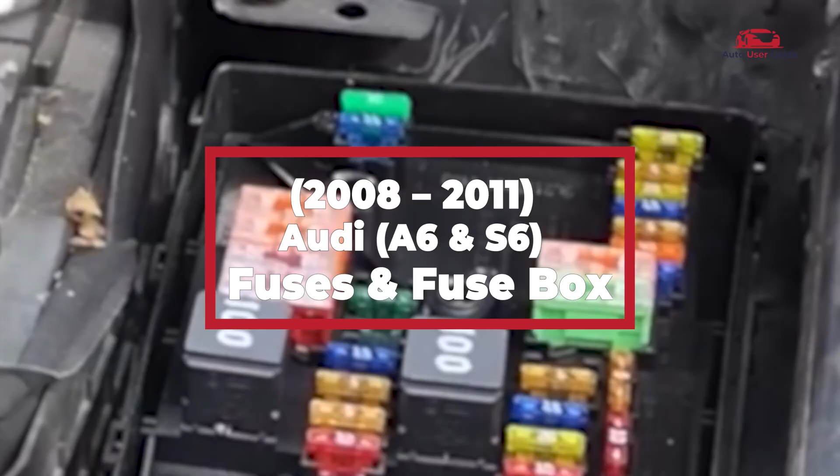Are you trying to locate the fuse box in your 2008 to 2011 Audi A6 and S6? Wondering where each fuse is placed or how to read the fuse box diagram correctly? In this guide, we'll walk you through the exact location of the fuse box and provide an easy-to-understand diagram to help you identify the fuses for various systems.

Passenger compartment fuse box.

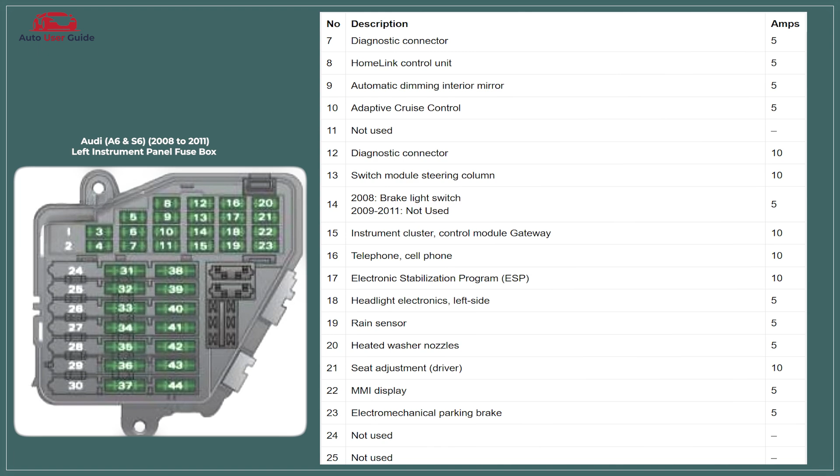The left instrument panel fuse box in the 2008 to 2011 Audi A6 and S6 powers key interior systems such as the instrument cluster, lighting controls, and infotainment. It also supports functions like the central locking system, diagnostic port, and electronic steering column lock.

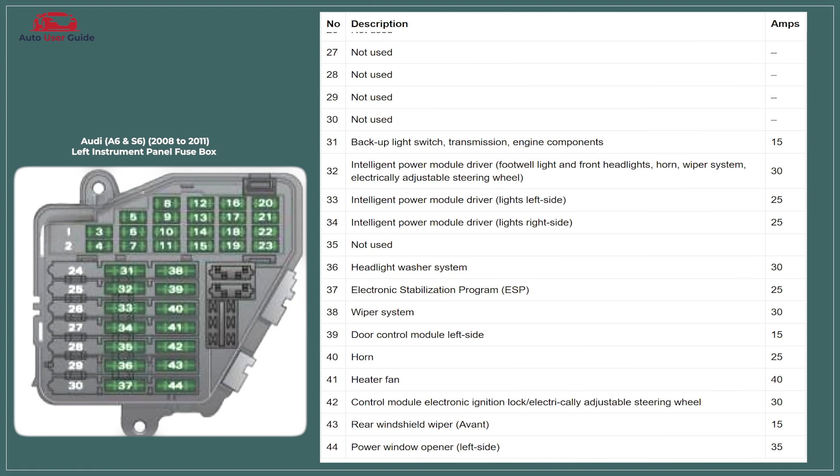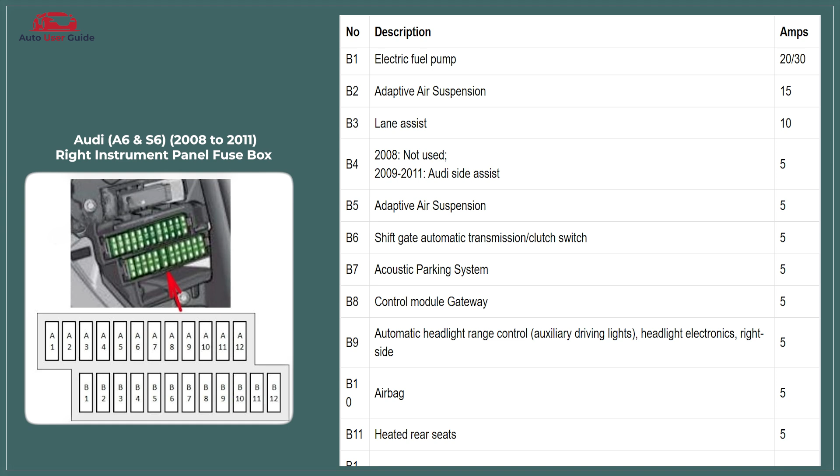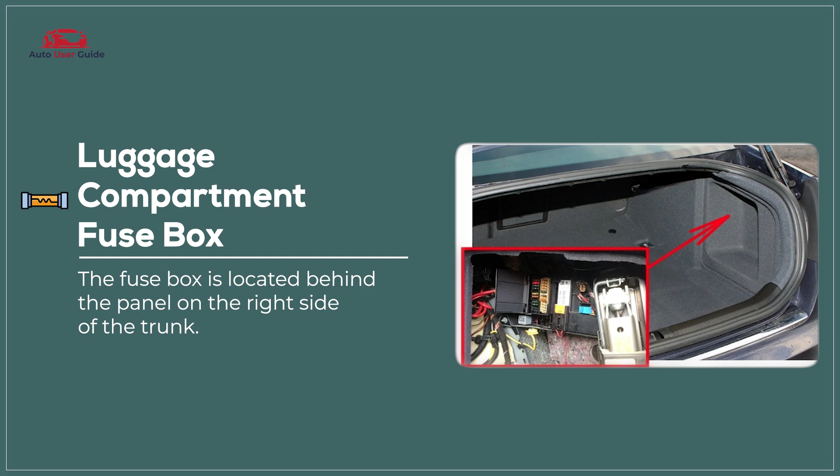The luggage compartment fuse box in the 2008 to 2011 Audi A6 and S6 is responsible for powering rear-end systems such as the rear lights, electric tailgate, parking sensors, and multimedia amplifier. It also supports components like the trailer module and rear power outlets.

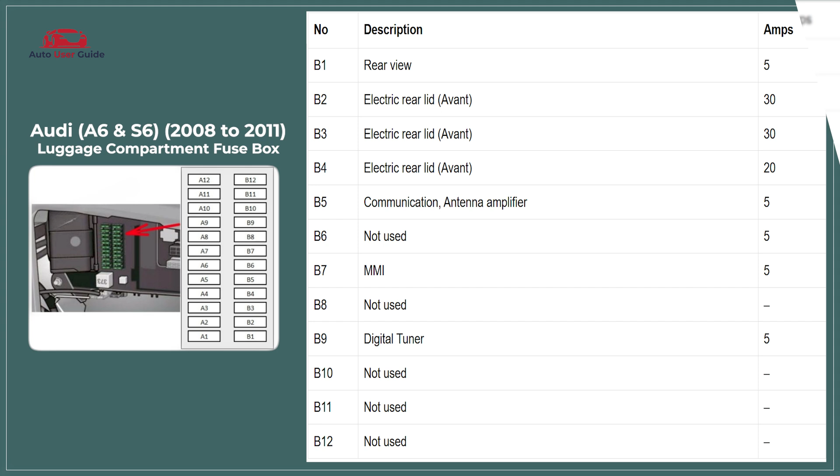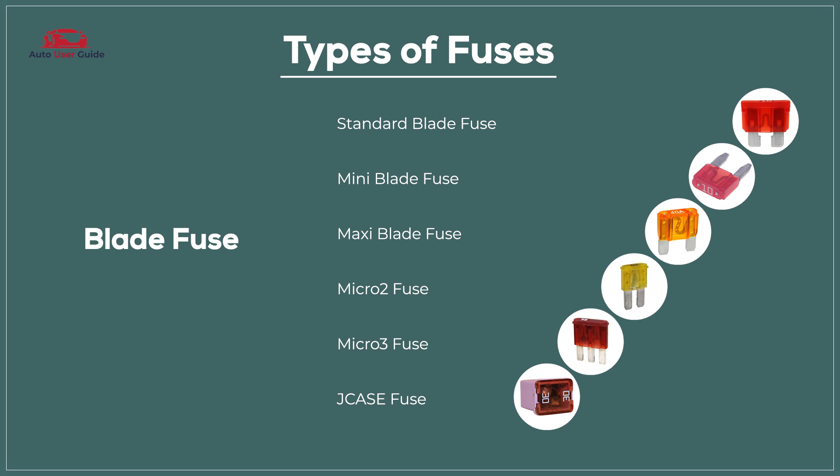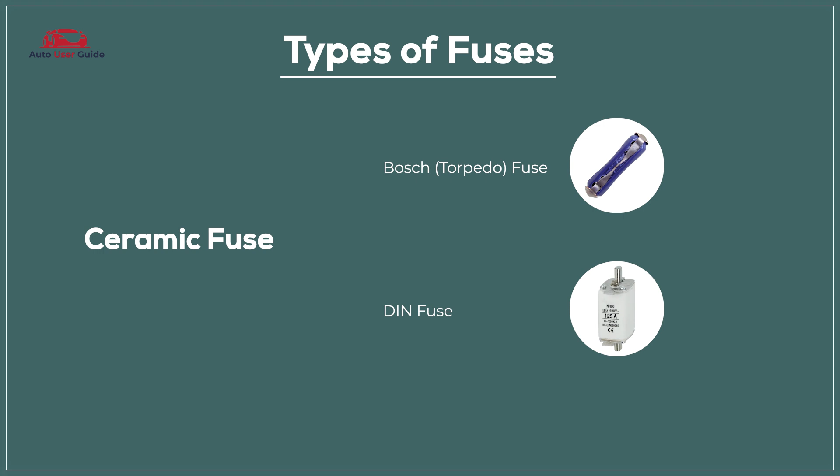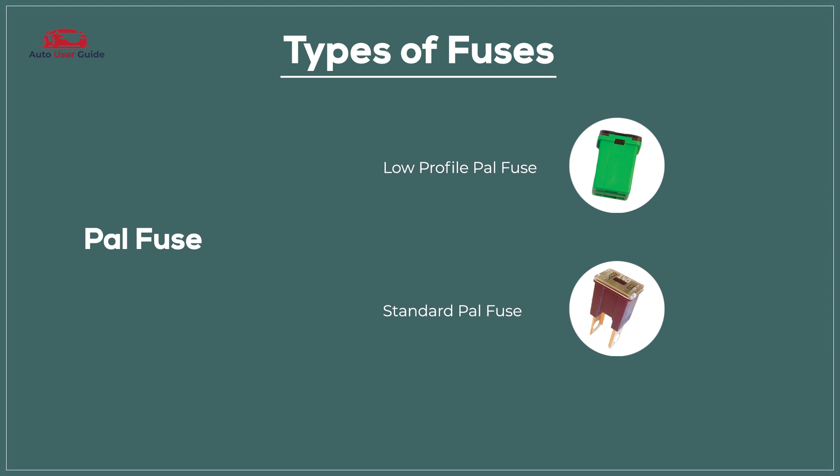Types of fuses: blade fuse, standard blade fuse, mini blade fuse, maxi blade fuse, micro 2 fuse, micro 3 fuse, J-case fuse. Glass tube fuse, AGC fuse, SFE fuse. Ceramic fuse, Bosch fuse, DIN fuse. PAL fuse, low profile PAL fuse, standard PAL fuse. Link fuse, mega fuse, high amperage link fuse.

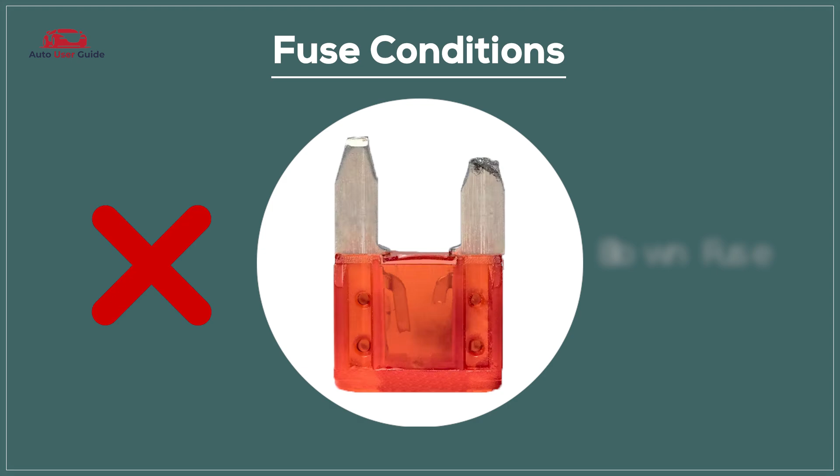Fuse conditions: blown fuse. A blown fuse means it's no longer functioning and needs replacement, while a perfect fuse is in good working condition and performing as expected.

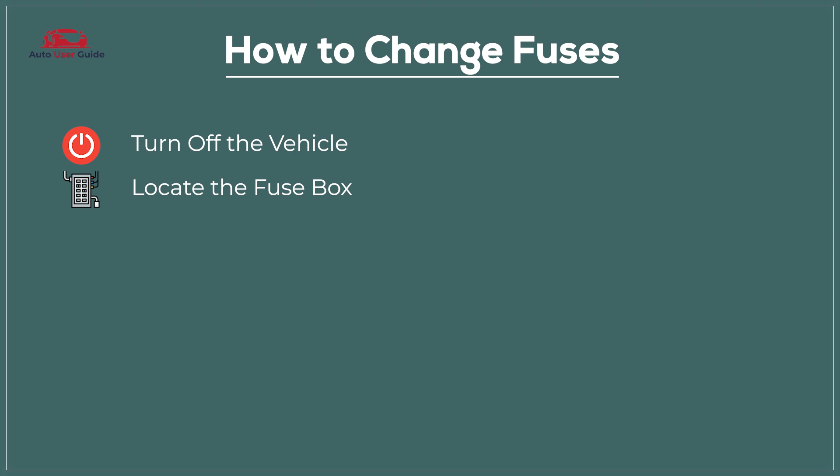How to change fuses: turn off the vehicle, locate the fuse box, identify the faulty fuse, remove the faulty fuse, inspect and obtain a replacement, install the new fuse, test the replacement.

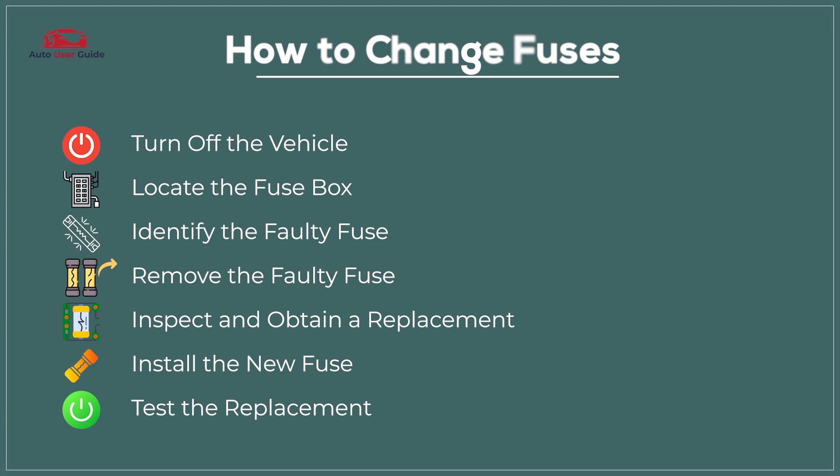Safety precautions: disconnect the battery, wear protective gear, use proper tools, check for correct amperage, avoid water exposure.